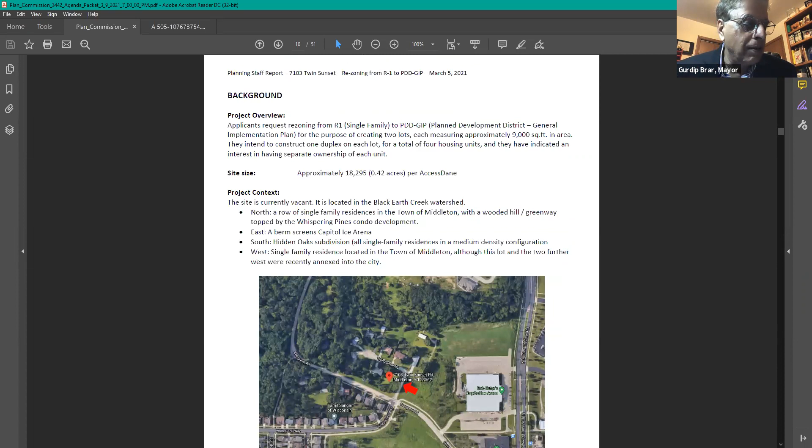We are on to agenda item number 1, recommendation for rezoning from R1 single family to Planned Development District, General Implementation Plan, for Koteshwar Katukam at 7103 Twin Sunset Road. Who's going to take it, Abby, or who is the... I did the staff report, Mayor. Okay, Mark, go ahead, you're it.

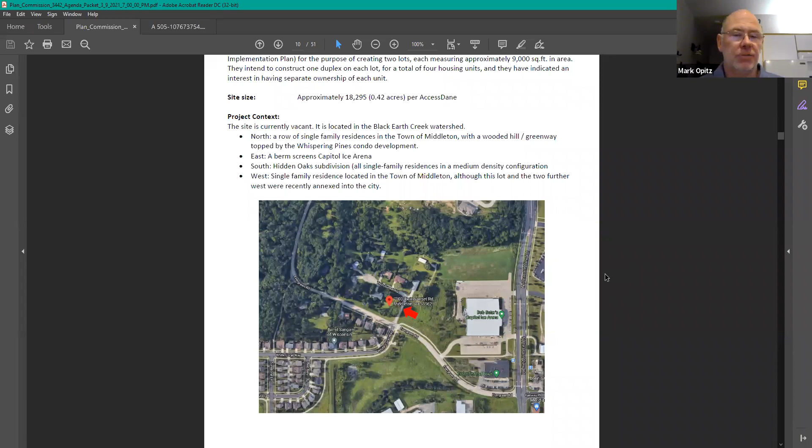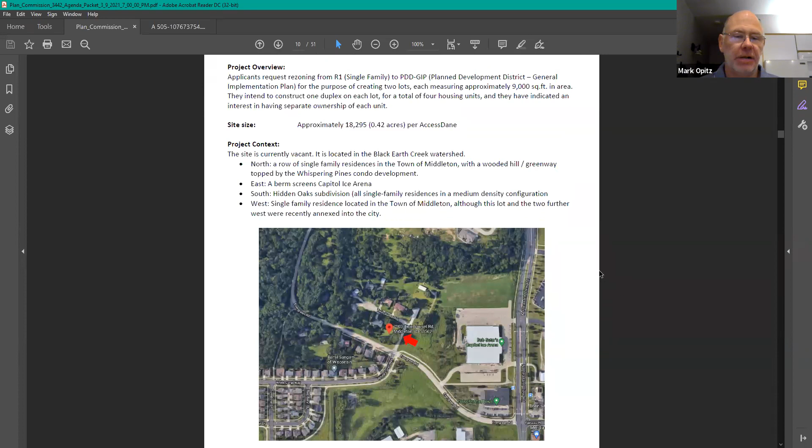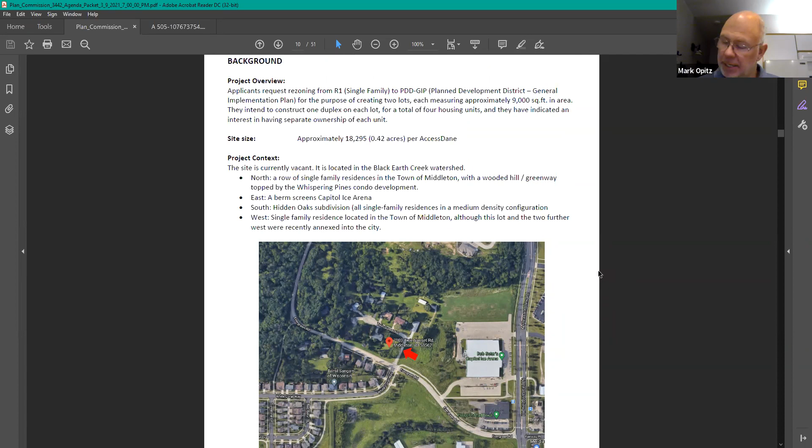In your packet tonight you see the staff report as well as the revised submittal from Kotesh. This was deferred at your January 13th meeting, the first meeting in January following a public hearing. You deferred action to allow the applicant time to work with city staff. He has submitted a revised site plan showing minimum setbacks, maximum building footprint, maximum impervious surface area. He also provided images showing other buildings in the Madison area similar in concept to what he's proposing.

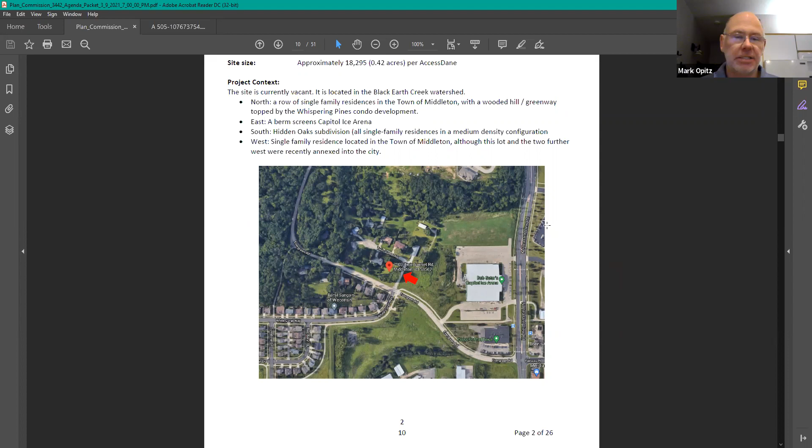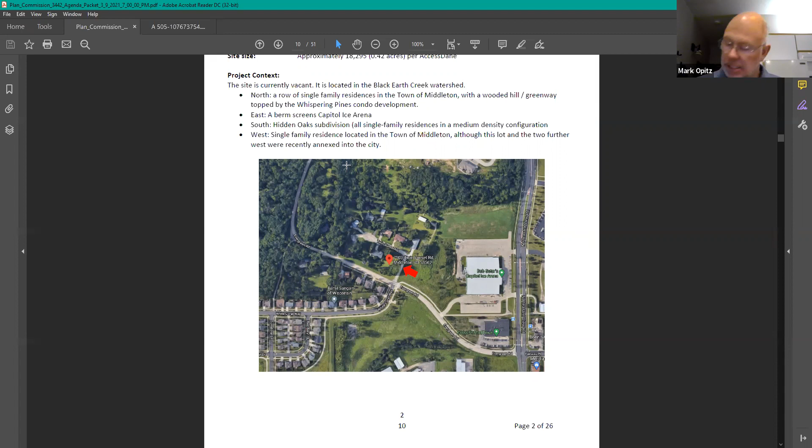He continues to propose a two-lot subdivision, each containing a two-family residence, so a duplex. In my view, reviewing the revised submittal, the plan remains consistent with what was before you at the public hearing two months ago. There are a couple issues that still need to be worked out if this plan is to move forward.

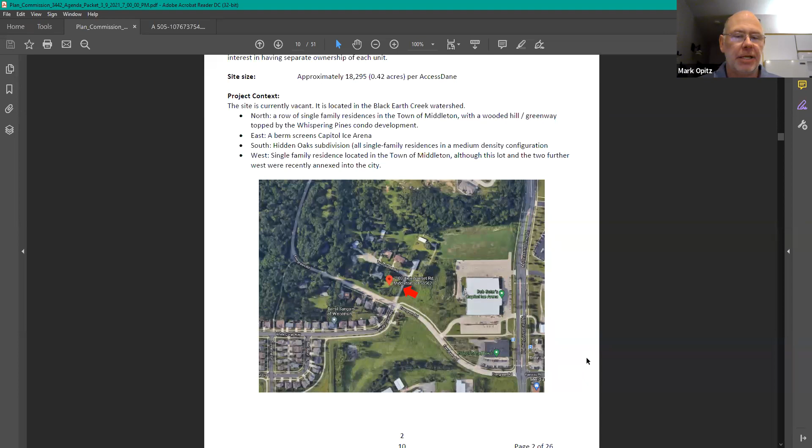One is making sure that utilities are extended beneath Twin Sunset to the northern lot. I believe he has submitted a site plan, and it doesn't probably show it quite as well as it could, but he understands that the sewer and water mains need to be put in Twin Sunset to serve the northern lot as a main, not as a lateral. That was feedback from David Sarbacher, our utility manager.

The other issue is the number of driveways and access off of Twin Sunset Road, which is a Town of Middleton road. So we have advised that he work with the Town of Middleton to obtain their consent. Should this move forward, he'll need their consent to connect driveways to Twin Sunset.

Stormwater is also a third concern, making sure that whatever moves forward has more than adequate stormwater management. He has worked with Gary Huth, our stormwater engineer, and the staff recommendation includes language identifying the stormwater concerns. That's all I have. I don't know, Mayor, if you wanted to hear from the applicant again. Abby, can you think of anything else I may have missed? I think that covered it, Mark. Okay, thanks. Well, now it's open to the Plan Commission for any questions or comments.

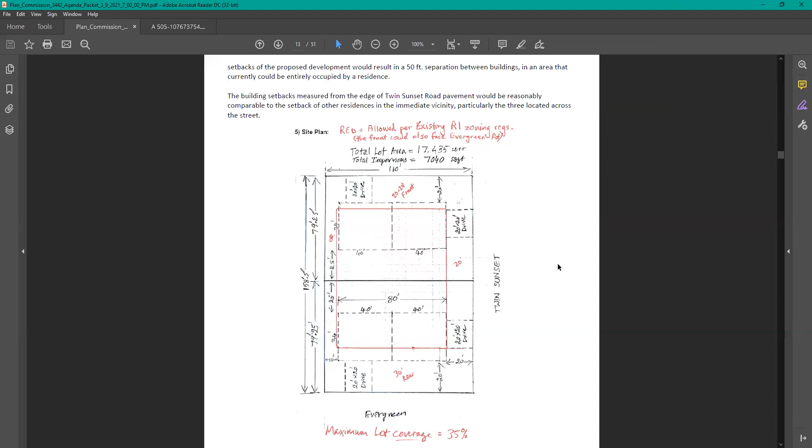And just so I'm clear, the 2 units that face Evergreen would have similar frontage, but one would have a front entry garage and one would have a side entry garage, in the same way that the 2 units on Twin Sunset, as it turns around the corner, would have the same frontage or front facade, but one a front entry garage and one a side entry garage? Or would there be, at least in this diagram Mark has up, the 2 houses on the eastern part of the 2 parcels facing east, and the others facing north and south? Does that make sense?

Yeah, this was guidance we had provided based on feedback we heard from the Plan Commission at the last meeting. The idea of not having two garage doors facing the same direction, but to have each have a frontage north and east, as you said, 2 frontages facing 2 streets. So there would be 2 fronts to the home, basically, to the residents. I mean, that's the concept.

And so I suggested that Kotesh provide us some photos of others in the area, and he did do that. There's a couple, I don't remember where that one is. So that from each side you look at it, it looks like a single family home. Right, because there's garages that are offset 90 degrees from each other.

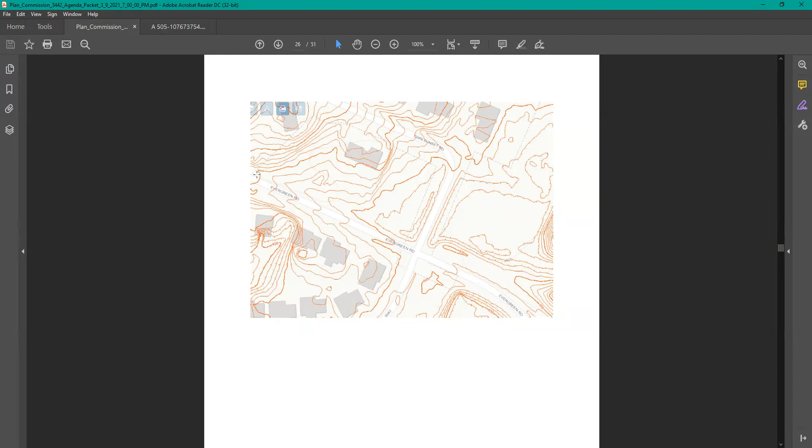Well, yeah, sorry, that's what I heard. I think with Public Works and Mark, we met some time back in a call, and there's almost 100 feet I have to run, and for each foot, I think $100 for water, $200 for sewer, so it's $300 per foot. So that's costing me close to $100,000.

That's what I heard, upfront cost. I mean, this is a challenge we come up with in other places when we want to have 2-unit buildings, duplexes, become 0 lot line divisions — the interpretation of Public Works is that every building that's a separate parcel needs its own lateral directly to a main, and the main's in the right of way. That becomes incredibly expensive, almost cost prohibitive for your project.

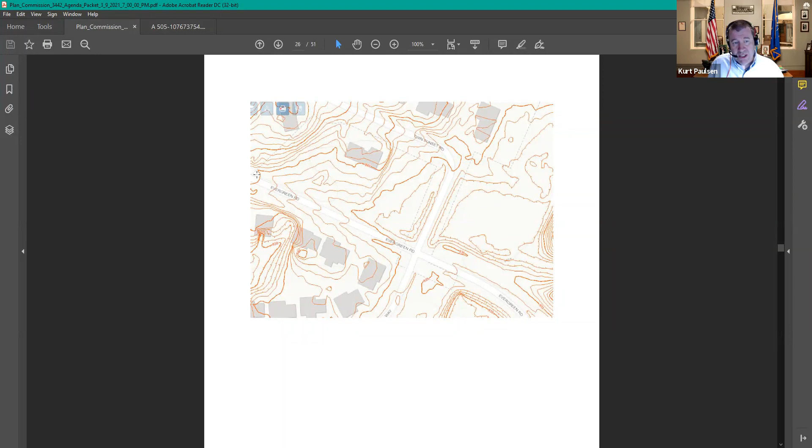So I guess I'll leave the comments there. I see others have questions, but I would say just to add—oh, I'm sorry, go ahead, Kotesh. You're the applicant. Oh, the mayor, I'm sorry. No, Mark, go ahead. So it's all, well, right.

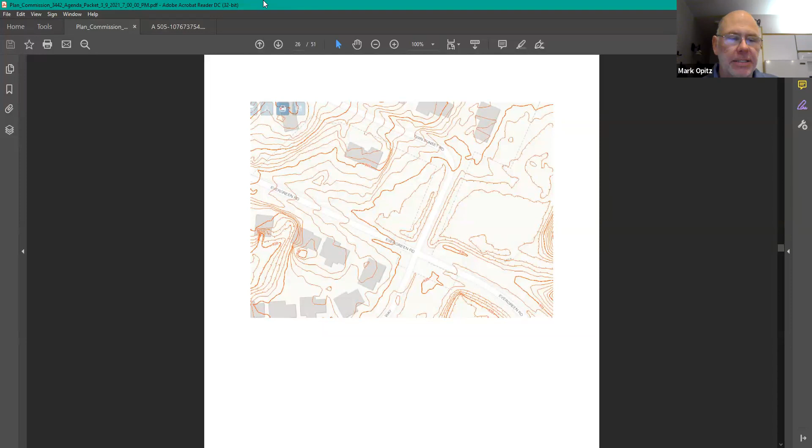I just was going to finish what Commissioner Paulsen commented, just to respond to that. Page 7 of the staff report has the policy of the city. It says the city requires each unit to have separate water and sewer lateral connections. At a minimum, the water lateral serving each unit must directly connect with the water main through the lot it serves. No water lateral can extend across a separately owned parcel. So it's water, I misspoke earlier.

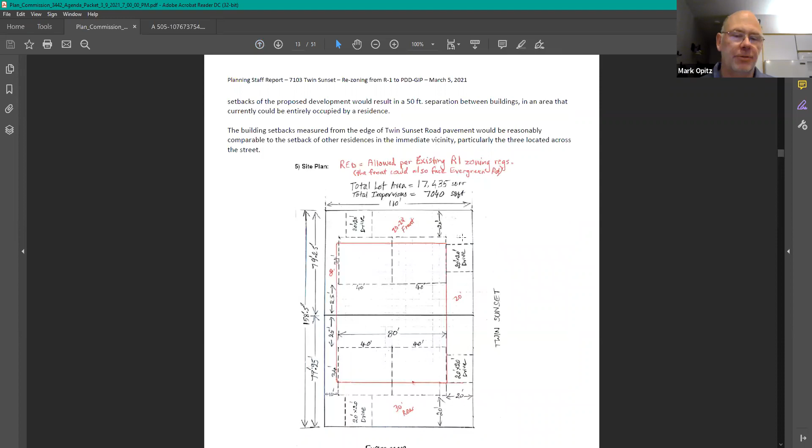Is that a city policy, not a state building code requirement? I think it's a state—I don't remember right now, Kurt. It certainly is a city policy, but I believe it comes from the state. And then also, the other point I was going to make is that the concept of extending the main is that in the future, if any other property owner on Twin Sunset wishes to annex to the city and connect to city infrastructure, then they just need to continue where the stub is.

Otherwise, they would have to pay for that all the way to Evergreen Road, which wouldn't really be fair. So that's, I think, the thinking.

I'm just going to flag this as a possible problem. If we think about various places in the city, if people want to develop zero lot line townhouses or zero lot line duplexes so that they're separate parcels, for mortgage purposes, so they can sell them as separate entities rather than a collective entity, this is going to be extremely cost prohibitive. That's why most of the duplexes we have in the city are one parcel, one lot, one mortgage.

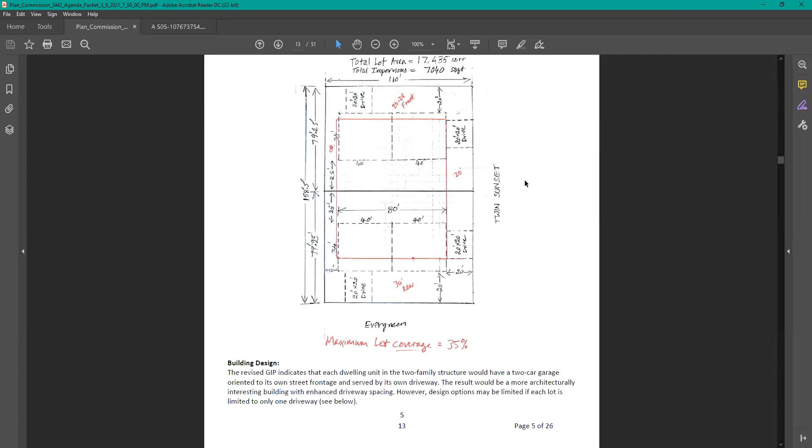Well, Kurt, you raised some very good points here. So if it moves forward, I guess you could help out the applicant and Mark. I think, if you think that's something which we need to change, we are rewriting that zoning. I don't know if that's involved or not. Whatever, if it's a state building code, we can't touch it at all. But the only other alternative is to have it be one lot with four units, kind of like a PDD. That's the only way around this.

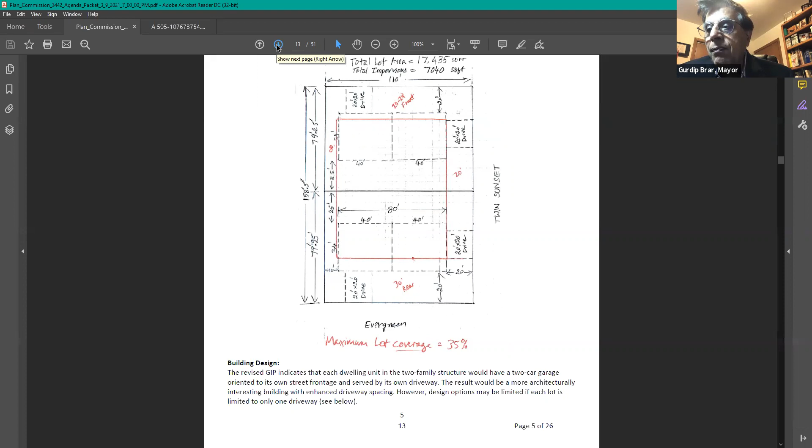So I'll stop now. Well, you are the expert in this area. What one part which I do like is that they look like single family homes. That is the part which I'm happy about.

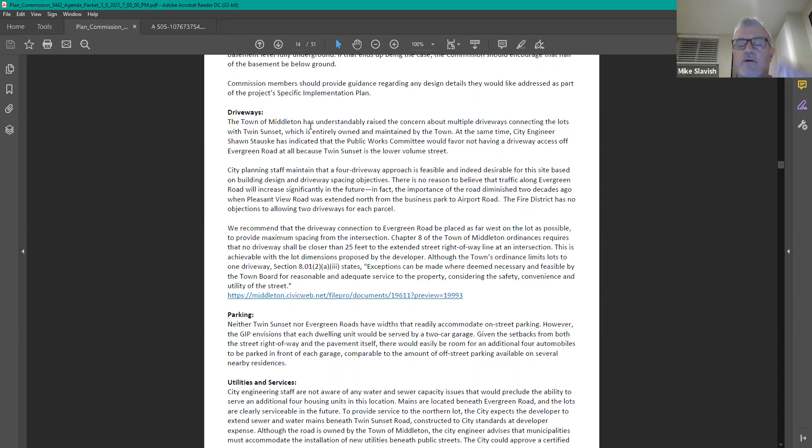Okay, so the other commissioners. Mayor, this is Mike. Mark, I had a question to follow up on Kurt's question. So if the developer has to build a main across or under Twin Sunset, does that main need to be sized accordingly to allow for future connections by others in the subdivision? And if so, I can't imagine that's going to be much cheaper than extending the line off of Evergreen, which I know you can't do, but from a cost standpoint, I think that is also going to be a significant challenge.

This is a little bit outside of my area, obviously Public Works. But I believe we have a certain minimum main size, and I would venture to bet that the minimum main size would be sufficient to serve the entirety of Twin Sunset. I want to say a 4-inch main, but I might be guessing. I just know that every street has a certain minimum size, and that probably will suffice here. So I don't think there's an extra upcharge that he's not paying for.

I understand your concern, but I don't think it's an upcharge. So this is really just a concern for the developer. But nobody seems to be paying attention to him.

Okay, I apologize, John and then Randy. So I fell asleep and I'm awake now. That's right. Okay, John and then Randy. Right, Randy.

Bruce, I have lots of issues. I've always had issues with this, and I still feel I don't understand why we're being so driven and so compelled to try to do a PDD and try to make this work. I agree with the town of Middleton that this is essentially a spot zoning issue for one developer and one piece of land who is having trouble dealing with the issues of the land and making money for it.

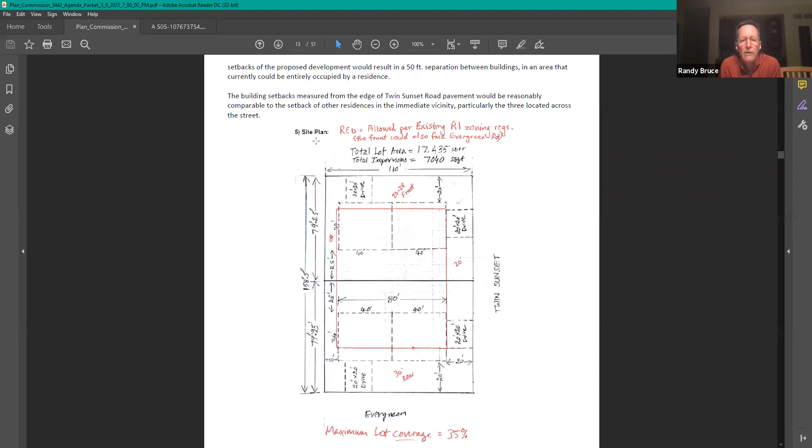A couple of comments I had about the design of the property and the GIP: there are a number of existing trees on the site, and many of the trees will lie in the yards, the front yard or side yards, and they're substantial trees. So if this moves forward, I'd want to make sure that the trees were surveyed and that we had some plans in place to keep the trees.

I would also like to see the design of the structure be as residential as possible, and to take some architectural cues from the surrounding neighborhood in terms of materials and style. I liked what Kurt had to say about keeping each street frontage having a garage door and an entrance for each unit, so that it really looks from the street like individual single family homes. And I think that would be successful.

I don't know if the building footprints themselves are going to be the 40 by 34 or 36 feet shown on the drawing, or if that's just the maximum extent of the footprint, which makes sense to me, that in the final design the footprints might be smaller, but they shouldn't go outside of those extents.

Then the one last question I have for staff is that the town had a consultant write a letter, and in it they talked about confirming that the rezoning would be consistent with the intergovernmental agreement. Has staff looked into that?

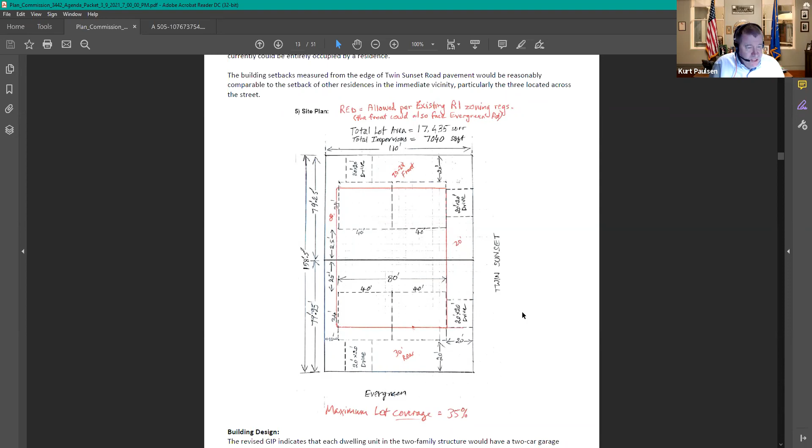Okay, well, all right, so then we need a motion. And Mayor, the motion that I see here is to, and I'll make it, I'm just reading on the staff notes here, to determine that the proposed GIP, the one submitted 3/5/21, is consistent with the city's comprehensive plan, and to recommend to Common Council a rezoning to PDD GIP with the contingencies listed in the staff comments.

Do you want me to read them all or just take them from the staff comments? No, I think we can all see it. All the plan commission members, they're published, so it's okay. So Abby can put that in there. Okay, need a second? This is Maria, second. Okay, so the motion by Kurt Paulsen, second by Jennifer Murray.

Any questions or comments now? Okay, so the motion by Kurt Paulsen and second by Jennifer Murray. This is to approve as it is recommended by the staff in the staff report dated 3/5/21.

No, so, pardon me? I need somebody to listen to this. Can you hear me? This is Melissa Dahman. Please, yeah, this is not a public hearing. I'm sorry. So this is for the plan commission members to participate.

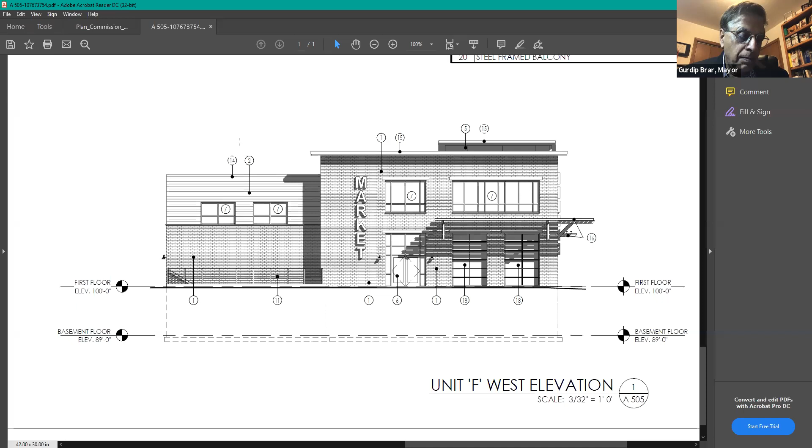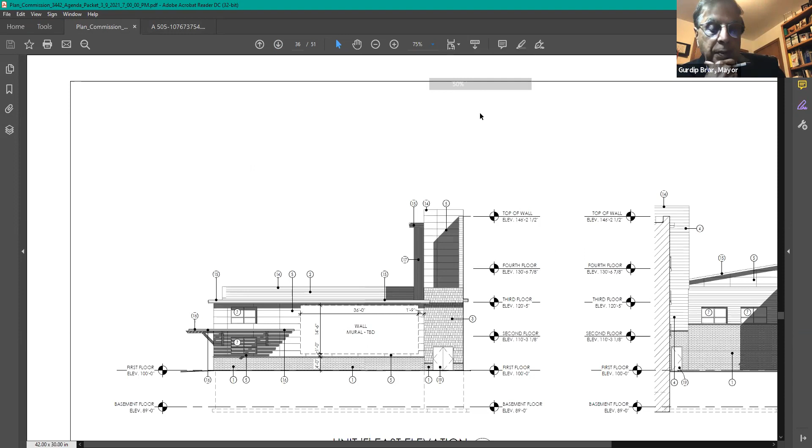The recommendation is the minor SIP modification to the SIP for the Middleton Market and Apartment, 7622 Lisa Lane. The Plan Commission talked about it earlier at the January 26th meeting. Okay, all those in favor of the motion to approve, say aye. Aye. Anyone opposed? Motion passes unanimously.

Okay, we are on to item number 3. That is the concept review, initial discussion of TIF District 5, project plan amendment number 1. Abby? Sure. Well, TIF District 5 is really beginning to see a significant amount of development.

It was a little slow to start during the recession, but now there are several development projects coming online, including the Middleton Market project, that one being the largest. Our staff is proposing that it might be a good time to look at our first amendment to the TIF district. TIF District 3 has seen, I believe, 10 amendments now, including the most recent one we did last year.

Where we subtracted just over $100 million in valuation and returned it to the general tax base. The purpose of this amendment would be to really take a look at properties within the TIF district that are not likely to redevelop or see any additional investment, remove those properties from the TIF district, which would enable us to extend the district to cover other properties where we might see some redevelopment activity.

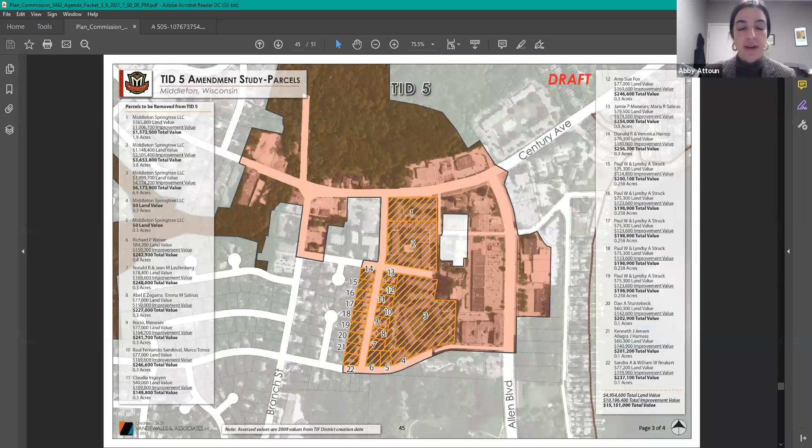So if we can remove these properties, we can then go to the next map, and it would enable us to add some properties, primarily the ones shown in blue that are west of the Beltline.

They are currently in TIF District 3, but because the life of TIF District 3 is 6 years shorter, we thought it might make sense to move those over to TIF 5, since they've been in TIF 3 for a long time and haven't redeveloped yet. But they are proximate to Spectrum Brands and some other large employers, so there might be a possibility for some more employment base on those blue parcels.

The parcels in purple on the north side of the city were added primarily due to public infrastructure needs in those areas. We need to extend Bellefontaine from Misty Valley west to connect up with Parmenter Street, and whether it ends up being a 4-lane as initially planned, or just a 2-lane road, there is some public infrastructure that needs to be improved in that area.

We'd also like to add the 2 parcels further south of the Studio West property, for any stormwater improvements the city may decide to make in that location.

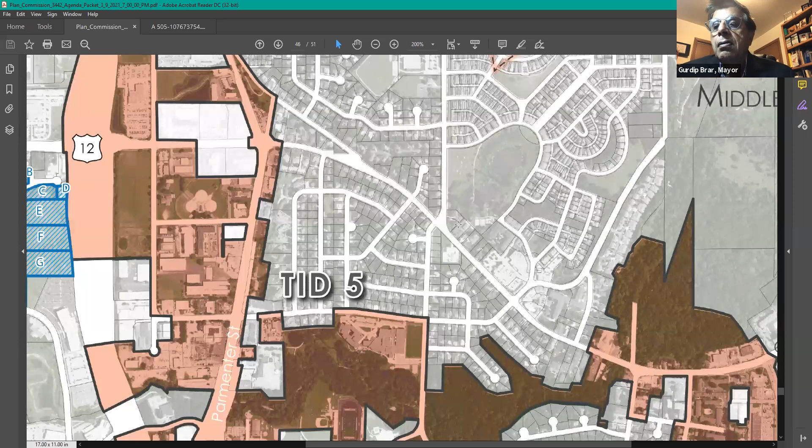Okay, so, any questions or comments from the Plan Commission members? So what are you ready for, a motion to send it to the Finance Committee or Council, or do you want to work on this more and then bring it back here?

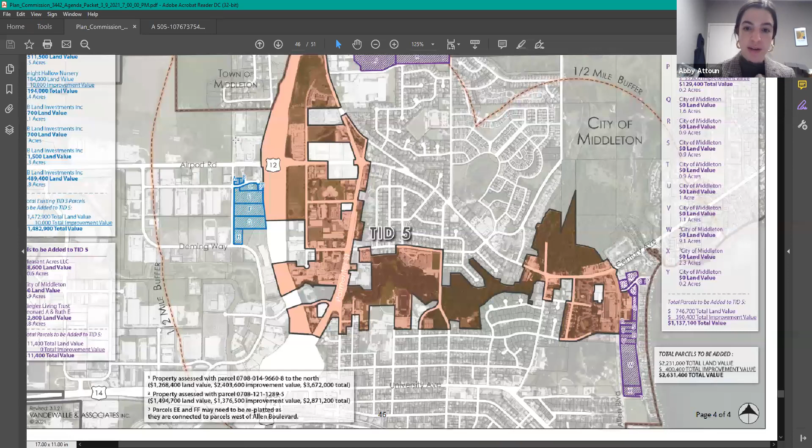Well, I think what we're asking for tonight is just concept review. Does it make sense for us to look at doing an amendment at this point? There's still going to be a lot of work to determine exactly which parcels are going to be subtracted and added, and I'm sure that is going to change a few times before this thing gets done. But what we were just asking is, do you agree that we should take a look at it right now? And we would need to get an amendment to our TIF contract with our planning consultants, because they usually help us prepare the amendment that we end up submitting to the DOR.

Okay, so let's hear from the Plan Commission members. And there would have to be a public hearing before the Plan Commission for any amendment coming up. Yes. And again, just inclusion in a TID does not necessarily mean that we anticipate that particular parcel will redevelop. It's just helping us get contiguity in the district to capture those parcels we think are likely to redevelop. And if we can do it, then we are capturing more increment for the district, which really helps some of the infrastructure projects that we anticipate.

Okay, so is there someone who is vehemently opposed to it? Let's start this way. I think it looks like, I know it started because of that restaurant going out of business, but it looks like a good idea. So, okay, well, I guess nobody seems to be opposed to it, so we can proceed.

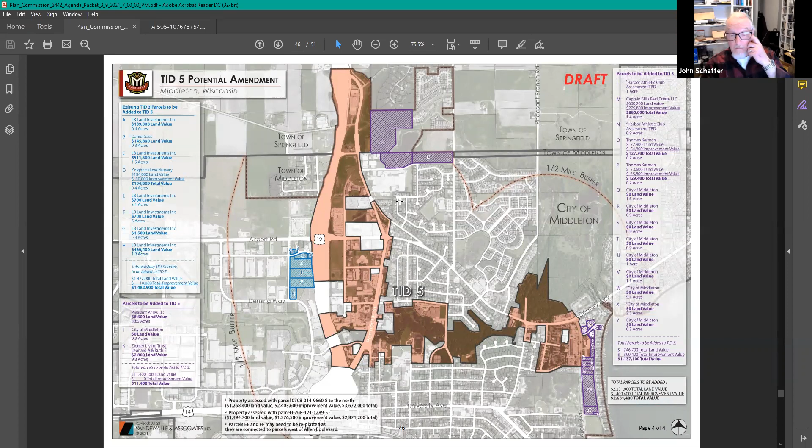We are on to item number 4: concept review of the options for the trailhead at Pheasant Branch Conservancy, 6612 Century Avenue. You've done a great job putting together the pros and cons, and everything looks good.

Thank you. Vandewalle did the concepts for us, and they also developed the pros and cons sheet, so we have to give kudos to Jeff Maloney and the team at Vandewalle for that.

What we included in your packet is 4 initial concepts. These have not gone to Conservancy lands yet, and they also have not been reviewed by the Friends of Pheasant Branch or the Ped Bike Transit Committee. Those are all steps we need to take as this proceeds.

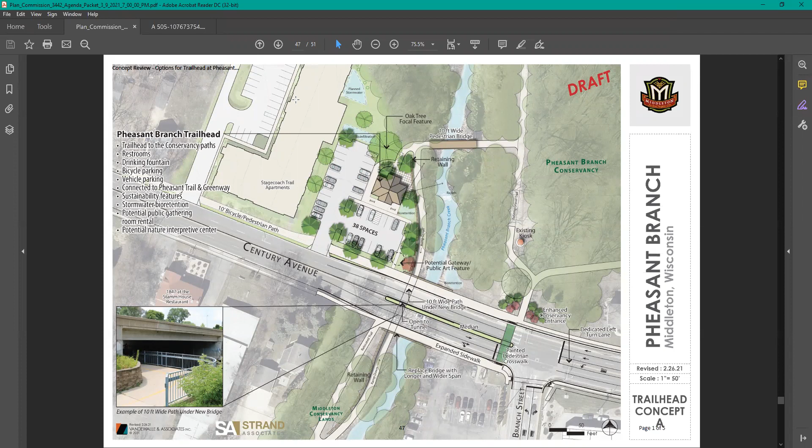The reason we included it on the Plan Commission agenda now is because we're on a pretty tight timeline due to the DNR grant we're applying for. I think it's a great opportunity for the city to potentially get the first phase of the trailhead, which would be just the parking lot and the pedestrian bridge, paid for using only the Century Avenue Bridge, which we've already gotten approval from the council to proceed down that path as our match. So we don't have any budgeted funds right now for design or construction of the trailhead. We're trying to seize an opportunity that's presented itself because of the Century Avenue Bridge project.

Our application deadline for the DNR grant is May 1st. We met with DNR staff, Matt Amundsen and I, and she was very complimentary of the project and felt it could be packaged with the Century Avenue Bridge. It would probably score pretty high. The city got a grant to acquire the trailhead property from Jacob Klein previously, and the DNR likes to fund improvements to properties they've helped put into public ownership. So we think it's a pretty good opportunity for us.

The concern is, depending on how we decide to position the shelter and the parking, those decisions will significantly change the cost estimates, and we need a pretty firm cost estimate to put into the grant application. So that's why we're suddenly bringing this forward to several committees at once to review.

In the pros and cons sheet, there were a couple items I wanted to update. One is on option D, where the parking lot is on the west side of the creek, and then we would put the trailhead into the Conservancy area. We had listed as a con that it may complicate the DNR stewardship grant, but Matt Amundsen has now met with our contact at the DNR, and they said that would not be a concern for them.